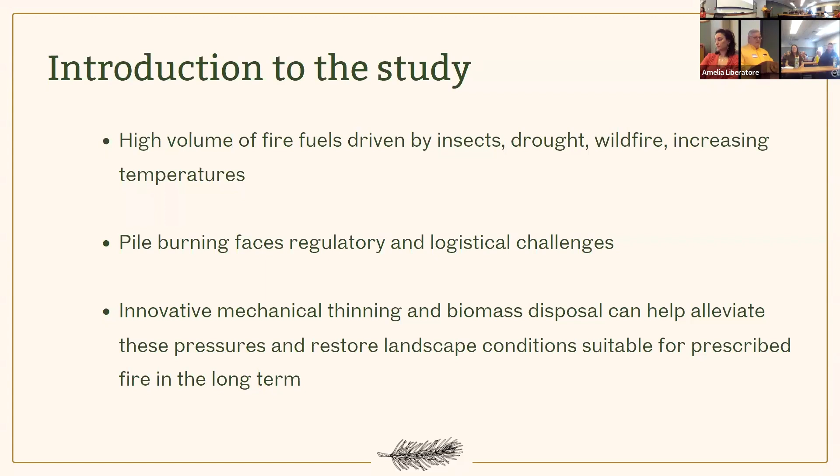So our first method, mastication. Mastication has been around for a long time. It's been done for a long time. It still has a place.

The problem we see in Southern Oregon, particularly in the Applegate, is there's so much fuel on the ground. It's important to state this study is all about preparing the ground to reduce the fuel level to the point where prescribed burning can be initiated. When you're through with fuels reduction, you've set that unit up for long-range management - the long-range plan of prescribed burning to let fire take care of the maintenance. Back when we were doing stewardship, one problem we ran into is we did a lot of mastication, a lot of fuels reduction, but there was never a long-range plan in place to deal with the fuel that grew back. So that solution now is going to be prescribed burning. That's what we're looking at setting up for.

So with mastication, again, in Southern Oregon, the Applegate Valley, there is so much fuel already on the ground, on the forest floor. Mastication doesn't get rid of the fuel - it grinds it up and leaves it on the forest floor. And so the buildup in most areas would be too significant to ever consider broadcast burning at that point. It's gonna burn too hot, tree mortality is gonna be high, and it's gonna be hard to control. So mastication has its limitations from that respect.

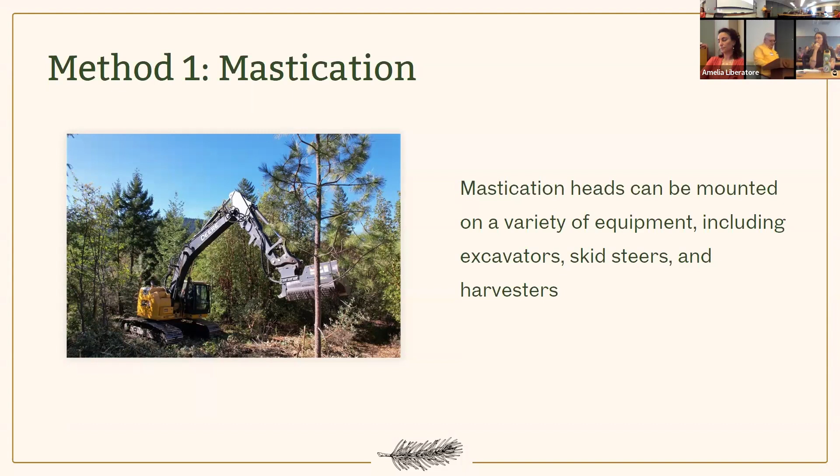When we compare mastication equipment, we look at a harvester with a masticator.

A harvester, when we say harvester, we're talking about a cut to length operation. There is harvester equipment manufactured that's designed to harvest trees, but it's adaptable to a mastication head. It has the ability to climb steep slopes. The one we refer to most is manufactured by Ponsse. Ponsse is the leader in harvester forwarder type equipment, and they're also the most innovative. There are other manufacturers that would work just fine, but most of my knowledge is around Ponsse equipment.

When you look at putting a masticating head on it, it's designed to be in the forest. They say it's suitable up to slopes of 45%. I probably wouldn't take it over 40%, but it's capable of doing that. It's capable of very low ground pressure, very maneuverable, and it's the most eco-friendly piece of equipment you can put out there. The downside is it's very expensive equipment, but when we talk about forestry applications, it gets expensive no matter what we do.

So compact track excavators certainly have their place. Most common with small woodland owners, especially in combination with some of the burn boxes we'll talk about. Skid steers with masticators are fairly popular, but limited to the small woodland owner or private ground. It's a good alternative.

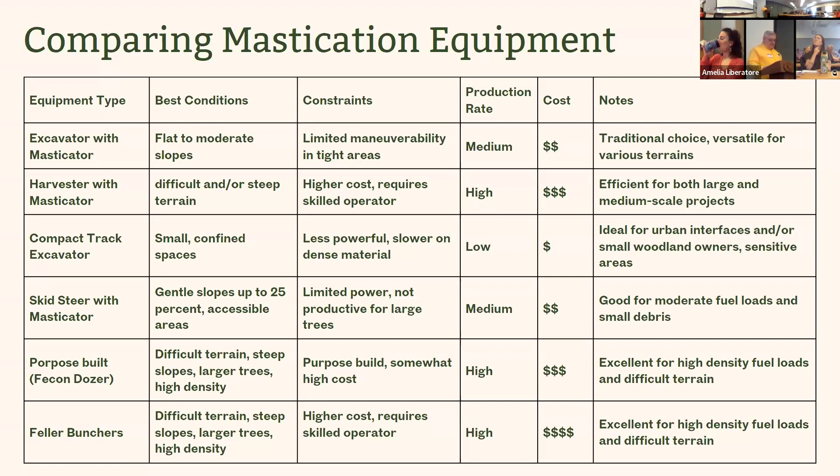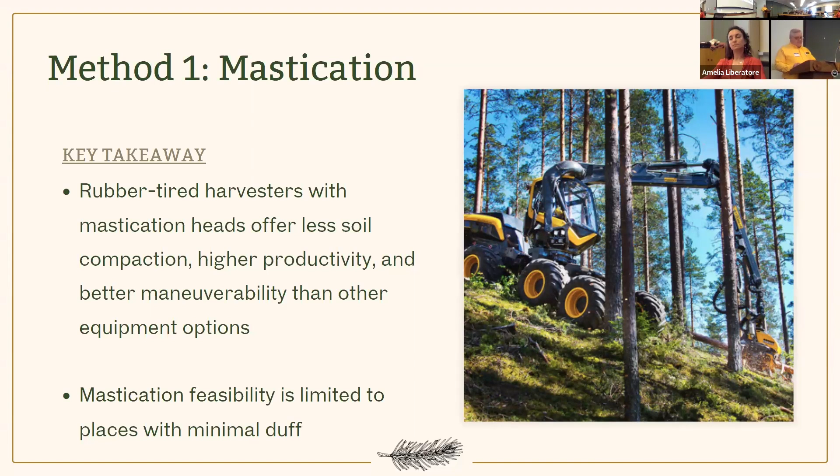So whether we talk about burn boxes or extracting biomass and taking it to markets, you still have to get it out of the woods. You still have to collect it and get it to a landing where you can process it and get it on a truck to its destination or into a burn box. So how do we efficiently transport biomass to landings and dispose of it in financially feasible ways? And the word financially is key here, because it doesn't matter what you do when you touch biomass, it gets expensive really quick.

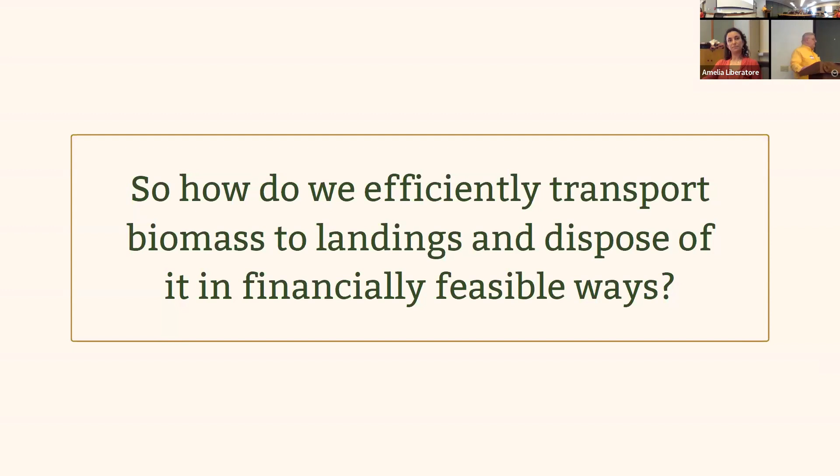So we're going to talk about harvesters and forwarders. We're going to talk about Ponsse a little bit. I was consulting to the Forest Service out of Phoenix, Arizona about 5 years ago, and Ponsse was there to demonstrate the capability of their biomass equipment. What they were demonstrating was a harvester and a forwarder in combination.

What they were harvesting was juniper. The juniper down there had literally taken over all of their grassland. Their state animal was the antelope, which had literally disappeared from the area because the juniper had taken over all the rangeland and consumed all the water. So they were looking at having to get rid of this. Ponsse went there and did a demonstration.

Ponsse started their program in 2006. They're based out of Finland, and they built specific equipment for harvesting what they call bioenergy. It was very successful in Finland and European forests, but it never actually got here. At the time we were doing stewardship, we had a cut-to-length operation with a forwarder and a harvester as well, and we did collect a lot of biomass with it, but at the time we just couldn't create the interest, and nobody really could see the need of where this was going to go, of how big this problem of biomass and fire fuels was going to become.

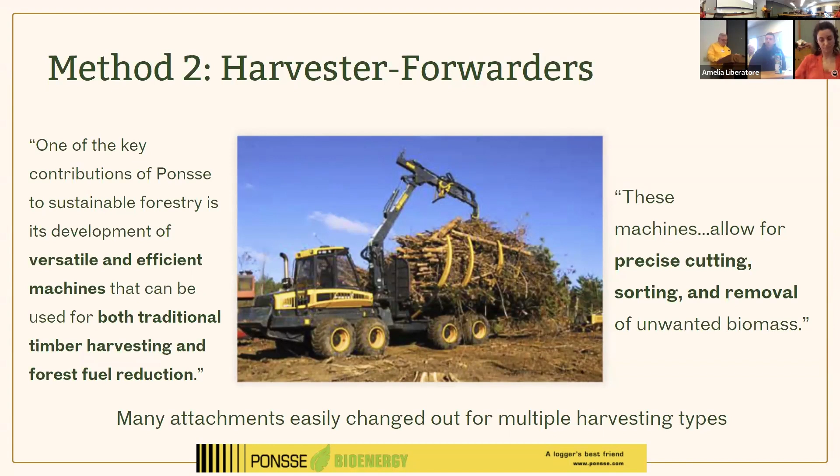So the process: this harvester goes through, performs the harvest, puts down the logs, and it goes onto a forwarder. The harvester knows when it grabs onto a tree whether it's going to make a saw log, a veneer log, or pulpwood, so it's cut and manufactured to what the end user requires. That sort is easily done on a forwarder.

So when that material gets to the landing, traditional log trucks come and all this material goes out, going to markets that we traditionally don't utilize. In stewardship, we had problems—we actually harvested a lot of suppressed Doug fir, which had a lot of rings per inch and very high density. At the time we were saying, there ought to be somebody that can use this.

So we introduced it to markets—most of that wood came off the Big Deep Springs watershed. We sent it to a couple of mills, trucked it to them, and they milled it up. It was beautiful wood. All of a sudden we had entrepreneurs trying to manufacture flooring out of it, and a lot of different applications.

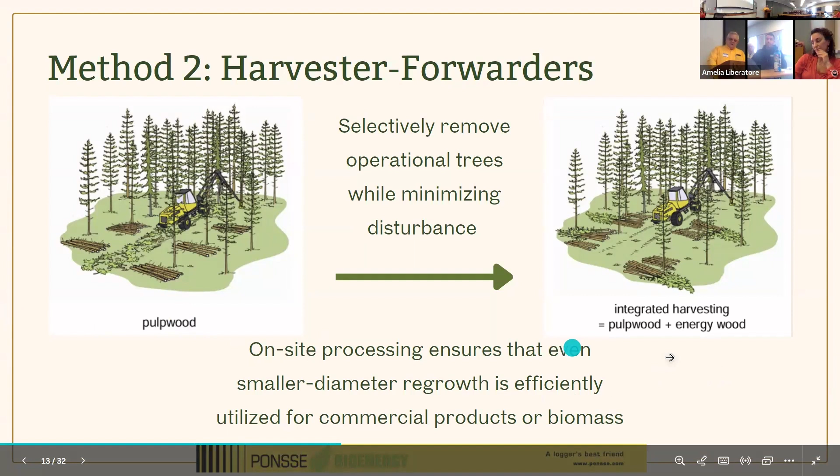Then it can lay that down on the ground. If it needs to cut it up shorter, it can reach up high, cut a tree off up high, hold onto the top of that tree, bring it down to the bottom, cut again, and it's got the whole tree. It's what brings speed to this operation, to improve the economics.

Typically, in a unit with a commercial component, it would go out and do the commercial harvest with a dangle head, processing all the merch trees. When it's done with that, it would go back and switch to this type of head and go in and collect all the biomass. It would distribute the biomass along the skid trails so the forwarder can come along, pick it all up, load it out, and take it to the landing.

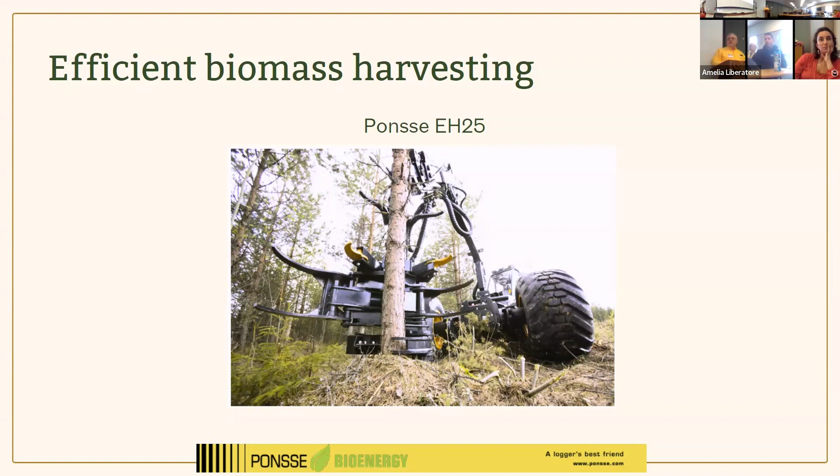So one of the big questions is how much wood can a forwarder possibly hold? Let's go to our next slide and look at a good example.

We've done it with our forwarder, and it's just amazing. In this case, Ponsse made hydraulic arms that compress that material on the forwarder itself. It's specifically designed to go after biomass, but it also works to bring the merch logs out. These hydraulic arms don't affect whether you're hauling merch wood or biomass, but they give you the capacity. When we were on AFR working with Don Boucher...

We had our forwarder up there because we were collecting biomass and taking it to a burn box. In that process, Don said, hey, we got all these hand piles out here, can you go get them? So I went out and took a look. There were no trails built for the forwarder to provide good access, but they'd thinned enough trees that I could get in between all of them. I ended up putting about 50 hand piles on the forwarder in one trip, which took about 30 minutes, and I had 50 piles collected and transported back to the burn box.

So it's doable. Ponsse put a lot of energy and thought into their technology. Their technology was perfected. I got a chance to see it work, and I can tell you it works very, very well.

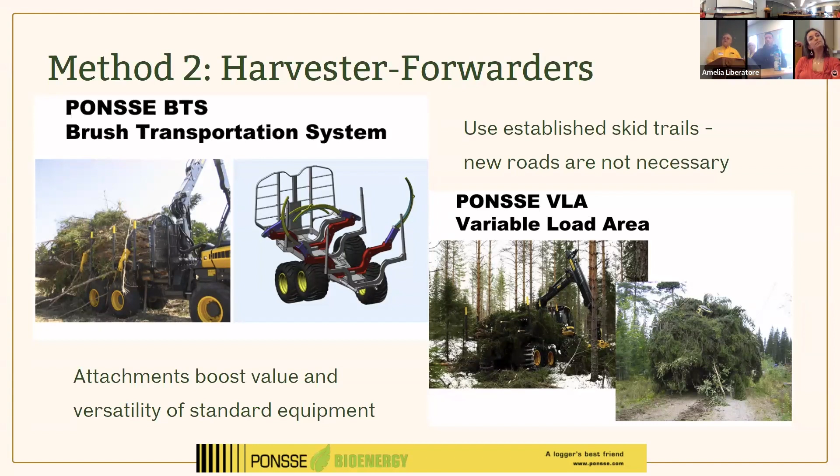They'll be placed along the skid trail for the forwarder to come pick up and take out, which then ends up on a truck going to pulpwood.

Pulpwood - for those who aren't aware, Roseburg Lumber Company opened a pulpwood site here about two and a half years ago out in White City. Even dead and dying trees still have good value as pulpwood, even if they've been dead for a while. They won't make a saw log or a veneer log, but they will make a pulpwood log. And then lastly, there's potential they could go to biomass as hog fuel.

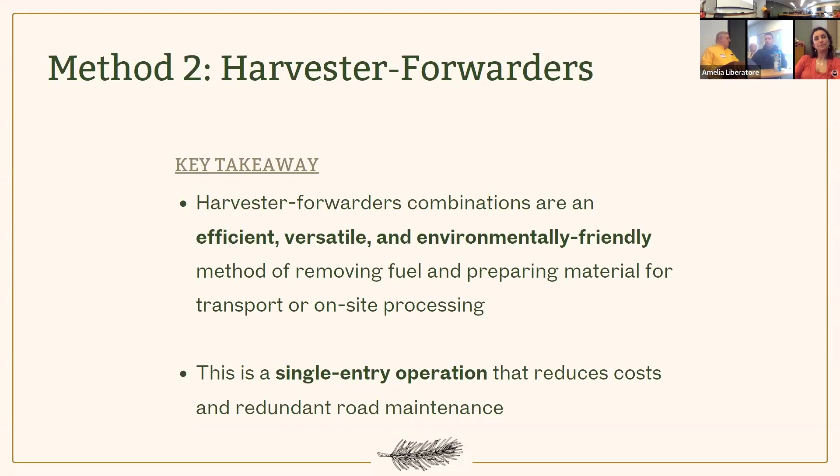Okay, burn boxes. When AFR was going on in Ashland, everything went pretty well until we got down to a trailhead called White Rabbit. White Rabbit had a helicopter log landing site there - they brought in all the logs and limbed them. We ended up with a huge mess there, and it's a popular trailhead for recreationalists, and recreation is a big component for Ashland. So that needed to be cleaned up.

The only feasible way we could see was to bring in a burn box and dispose of that material in it. We were able to find a burn box up in Washington, rent it, bring it down, and put it to work. That was new technology at the time - there weren't any burn boxes out here, very few of them.

We really tried to take that technology to every conceivable scenario we could think of while we had it. We invited Oregon DEQ out to do emissions testing on it, and we did a lot of different scenarios to increase production - we put it to as many uses as we could think of. Actually, when we were done with it, we looked at making biochar, which was also in its infancy at the time.

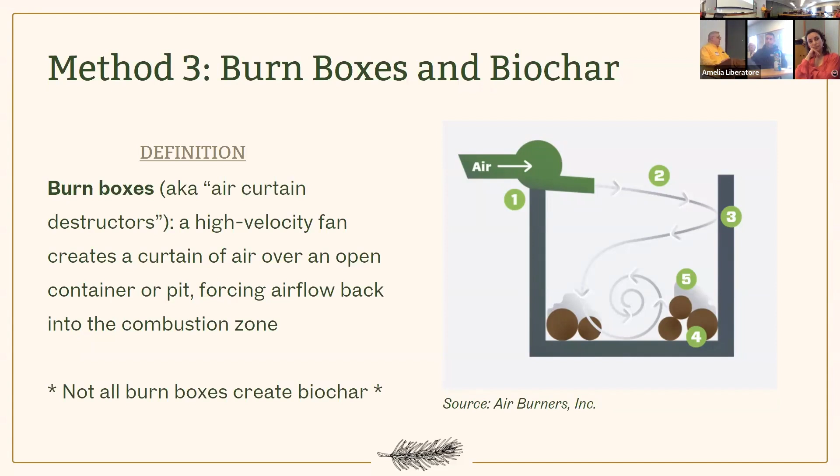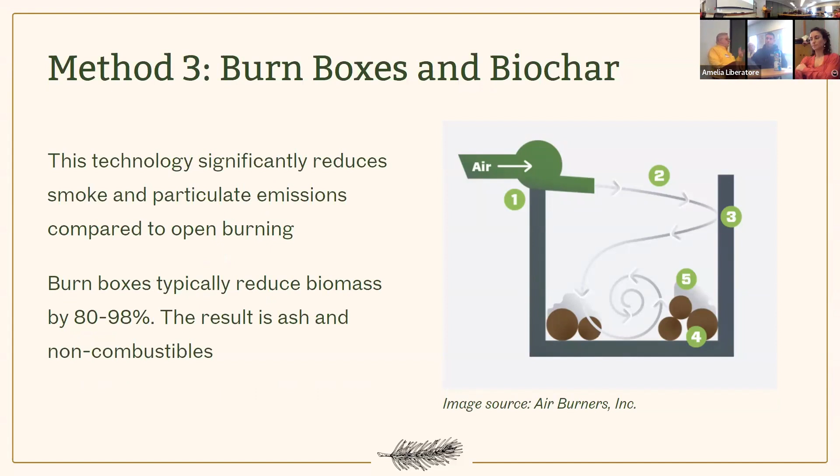There are basically two manufacturers available in the United States: Air Burners, located in Florida, and Tiger Cat, manufactured in Ontario, Canada. So those are your two choices if you're going to buy a commercial big burn box.

You want to start talking about them, or should I go back? No, we're good.

Air Burners out of Florida manufactures a number of small trailer-mounted units. They partnered with the Rocky Mountain Research Station, US Forest Service, to develop a trailer-mounted burner that produces biochar. It's a fairly popular box because it works well for the small woodlands owner and for rural communities that need to clean up small properties around their home. They can trailer these in, make biochar if they want, and it's a good method for disposing of material on small lots.

At the same time, Air Burner makes the really big boxes. The big boxes' application is at landscape scale—if you're treating units of 50, 100, or 150 acres, you're into the really big boxes. These only produce half a ton to one ton of biomass an hour. Calculate that out, and at the end of the day maybe you get rid of 8 tons of biomass. On a small woodland project, that's probably quite a bit—it would far exceed the kilns people are utilizing now, so it would be a good step forward.

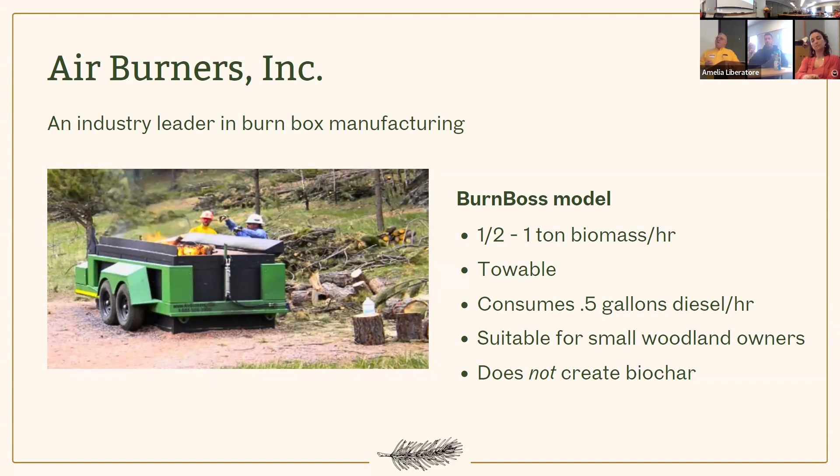They also make a track-driven model. I see the benefit of this track model in that small woodland owners don't have to bring their wood to a landing or central location on their property. It will traverse across their property, and they can use a small excavator or skid steer to supply it with wood, eliminating the cost of transporting material. It doesn't have wheels, so it has to be put on a trailer and trailered everywhere, but it can still be pulled with a one-ton pickup truck. That's the benefit of using that technology.

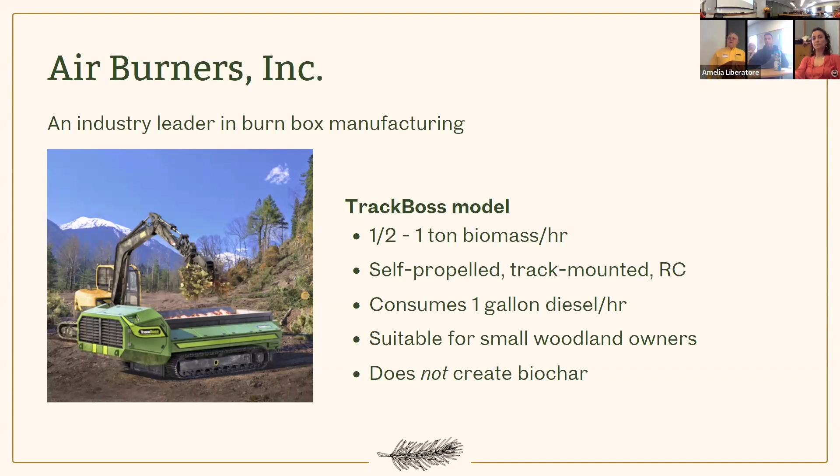Again, this box does not make biochar. Let's go to the next one—this is their Firebox series. I think we have a slide of the Char Boss. Yes, let's go to the Char Boss before we go to that.

This is what they call the Char Boss. This model is actually patented, a shared patent between Air Burners and the US Forest Service, designed to manufacture biochar. Its production processing biomass is about one ton an hour. It's towable behind a pickup and takes very little diesel fuel. It does require a water supply, since the biochar has to be quenched as it comes off the bottom of the burner on fire. It's got trays underneath that form a water bath to extinguish the fire in the biochar and bring it out the back.

Rocky Mountain Research Station puts a pretty high value on biochar. They just published a paper by our local biochar expert, Kelpie Wilson—I'm sure anybody into biochar knows who she is. She had an opportunity to work with this along with the kilns and everything else she offers. The research station has done a lot of soil work with biochar and considers it a valuable soil enhancement for the forest. So that's the Char Boss.

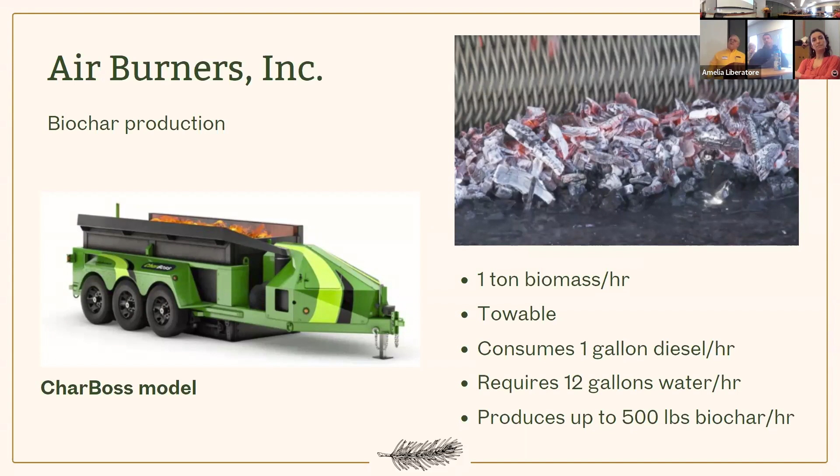Their big series is the FireBox series. This is the machine we used on AFR, and it's got some Achilles heels, no doubt about it. It's really difficult to move—it sets on the ground with no bottom in it, so you're burning right on top of the ground. This thing weighs in at about 58,000 pounds. We moved it from site to site by pulling it with a D7 dozer and pushing it with a 2154 John Deere log loader at the same time, and it took both of them to get this box to move.

Their method for cleaning this box out is it has a door on the other end of it, and that door opens, but it's still got braces across there, so you reach in there with a backhoe and dig all the ash out of it every day. Ash accumulation, if you're really pushing this box, will build up relatively quickly. So the problem with that is that these boxes are lined with a refractory material.

It is the heat insulation that protects everything around it. It protects the box from just burning up. That refractory material has a very high silica content and it's very fragile. So we learned right away, backhoes are not the answer. Digging this thing out with a backhoe, you're gonna be replacing this refractory. All the panels in the side of that are replaceable and they contain that refractory material.

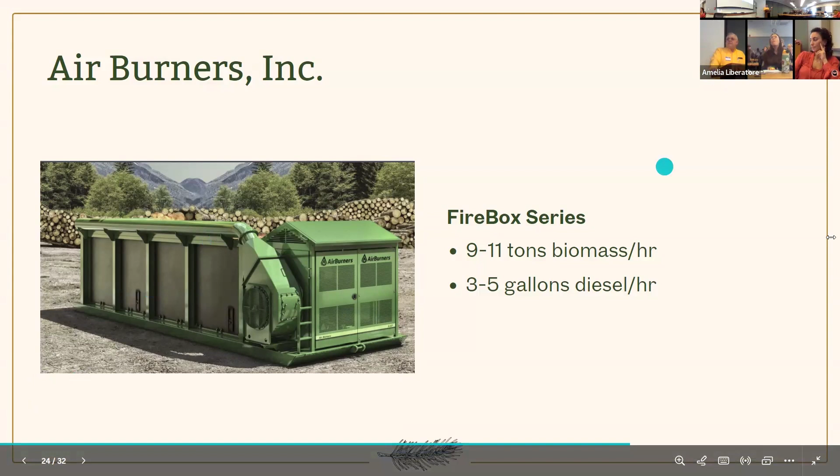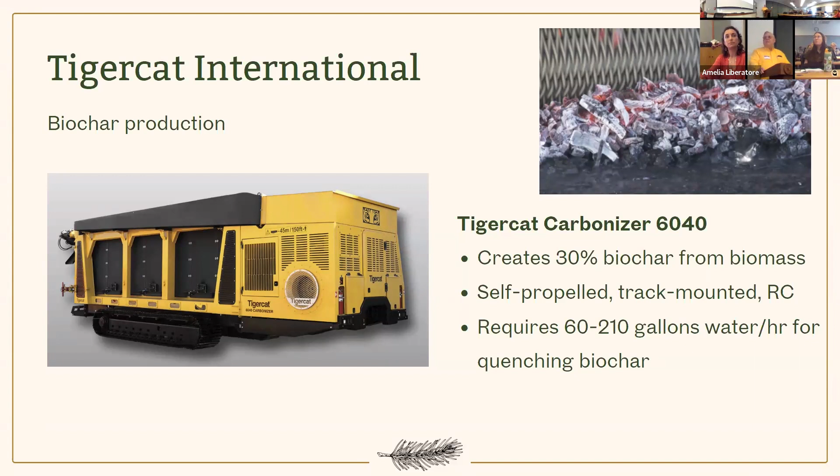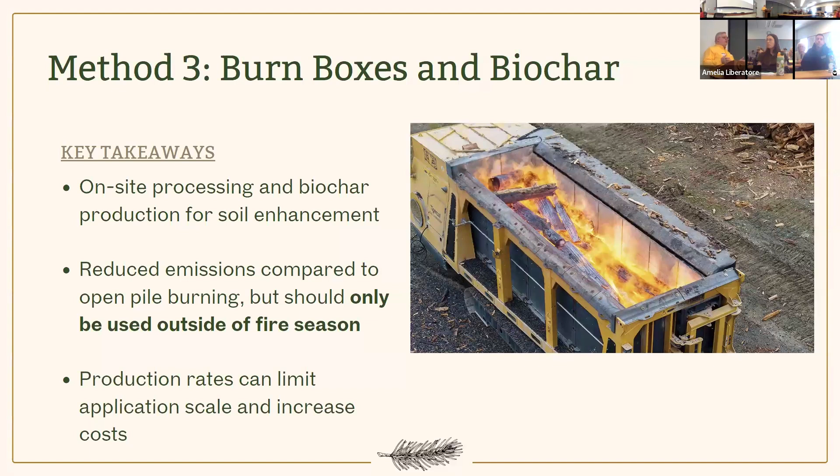So key takeaways: on-site processing and biochar production for soil enhancement. I've said many times, the feasibility of making biochar is completely dependent on your ability to market that biochar, or the value that the Forest Service, the BLM, or one of the agencies would put on it. The Rocky Mountain Research Station has a written report coming out soon that goes into detail about all the testing and research that has been done and the value placed on biochar. The studies that have been done are referenced in there, so you can take a look at that. But as land managers, the value is going to be what value you put on that biochar.

In this operation, in fuels reduction, that biochar could easily be taken right out of the box, quenched, and put on all the trails and soil disturbance created in that unit to enhance the soil and get a faster recovery and a more productive soil out of it. There's going to have to be some homework done on what that value is and what's best going to work.

Okay, I think we've covered everything on that. Transporting biomass to markets.

When we talk about transporting biomass, grinding it into hog fuel and taking it to Biomass One, I happen to be a huge supporter of Biomass One, not because I like the guys, but I do. Very few people realize the benefit that Biomass One has for this valley and the contribution they make. We're unique in that for about a 45-mile radius around the biomass plant, it's feasible to bring that material in and turn it into energy instead of traditionally lighting it on fire and sending it up as pollutants. To me personally, that means a lot. I put a very high value on the fact that we have a Biomass One plant here in Jackson County.

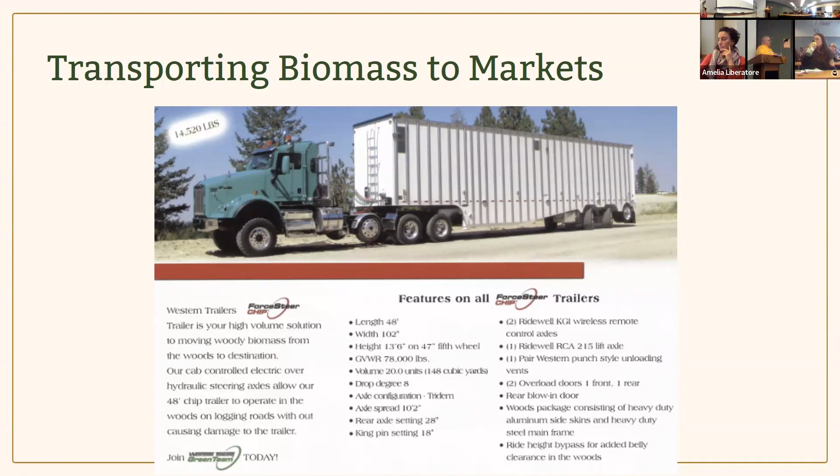So the point I'm trying to make is if we're going to implement a project like this and consider Biomass One for disposal of our biomass, or what I'd like to say is converting it to energy, then we've got to have good contracts in place.

The one that really needs to be going out there and collecting that material needs to come on board as a strategic partner to the agencies, to perform that service under long-term contracts—that would be Biomass One. They already go out and collect what they can, and they have the trucks and grinders and everything they need. They don't have the big trucks, they don't have the good trucks. These truck trailer combinations are over $500,000 a pop.

They're not cheap. And that's if Western Trailers will even build them, because everybody lost interest in it. I asked them, if we had an order for these trailers, would you build them? They said, well, maybe if you came in and said we want like 4 of them, we'd build them again. That's when I talk about a paradigm shift where we have to look at long-term contracts—what's it gonna take to get this material out on a reliable basis and have this operation continue without breaking down and leaving anybody out to dry.